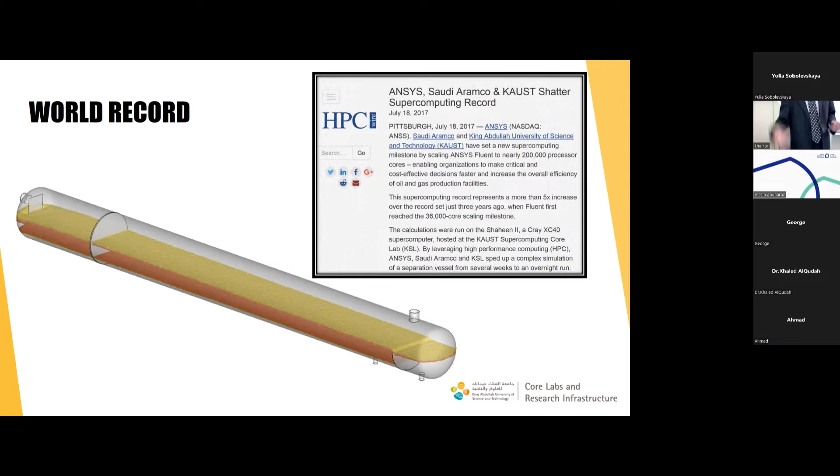You guys do a huge number of parametric sweeps because you don't know any material property of your problem, right? You don't know your geometry. So you just do a parametric sweep, you just want to run a parametric sweep. You have 2D matrices, you want to populate your results, some output on these 2D matrices. You do that, right? So what you have to do, your single problem is small enough.

You can get your result in one day, but you have to run 1,000 problems, maybe 10,000. If you are doing data science, many of your colleagues are doing data science on these artificially generated simulations. In order to have any meaningful deep learning workflow, you need huge amounts of data sets to train it, right? So all these parametric sweeps can happen on a supercomputer. All you have to do is write a simple Python script, have some intelligence in your input file where you can change the parameter with a script, and just submit this job.

Nice F1 car. I remember I told you that I need to motivate you guys. Okay, is this enough or not? So what do you see in this slide? Yeah, speak loud, it's okay.

Okay, let's get some terminology out of the way. What is a speedup number? There's no deep mathematics or computer science here. It's not an increment, it's a ratio. Speedup number means you take one core count as a reference.

Normally it's based on one core's performance, but you can start from anywhere. You run a simulation on n number of cores, then double the core count. Your time to solution should reduce, so the ratio of those times, the reciprocal, gives you the speedup number. Ideally, if you double your core count, your time to solution should halve, so the speedup number should be 2.

So what's happening? On 1024 cores, that's our base. On 2048, we get 1.8, when ideally it should be 2. Good enough. At 4 times the cores, we should get 4, but we're getting 3.4, not proportional.

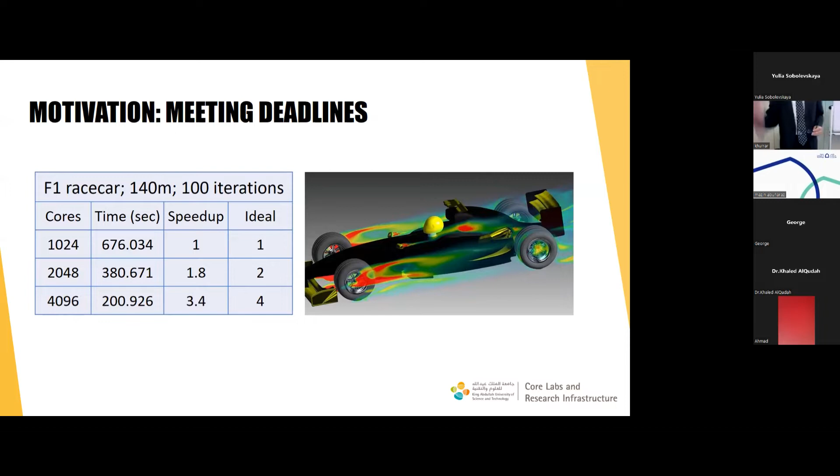Now I'll show you an actual hands-on session. Seeing is believing, you'll run the same problem on one node, then on 16 nodes. I did a screen capture, so you can see 65 iterations versus almost 1,000 iterations. It's real, not abstract, not just theoretical numbers. You'll see that parallel scalability does affect your time to solution.

Okay, this is a heavy slide, let's go slowly. I think you've covered pretty much all of these things in this workshop, so let's use this slide to repeat what we learned. You learned about partial differential equations. Is it safe to assume any master's student would have gone through partial differential equations? Or maybe there's some program where you don't cover them. Well, Navier-Stokes is a partial differential equation.

So you need to learn a little bit of partial differential equations. With every partial differential equation, you have some boundary conditions, Neumann boundary condition, Dirichlet boundary condition, and then you have initial condition if it's a time unsteady PDE. Then you need to know whether your problem is steady state or unsteady.

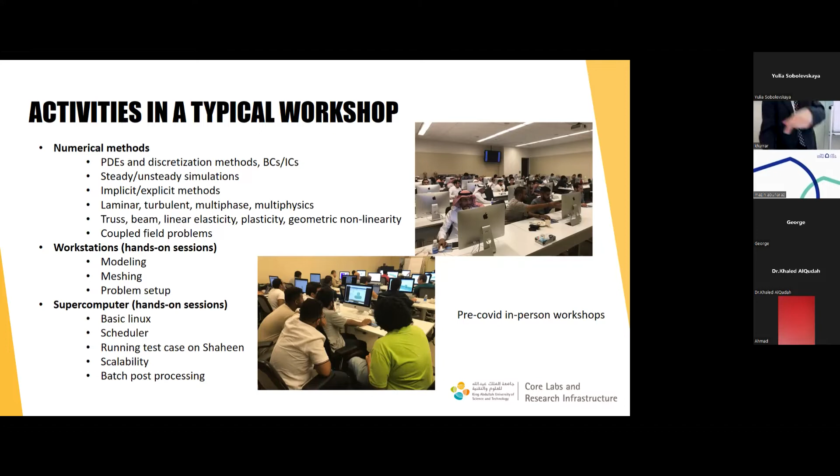Okay, so again, I think you cover modeling, meshing, and problem setup, and then you take it on a supercomputer and run it. I think we will do all of that by hand, and we have been doing it with the students, and they take a good interest in all of that.

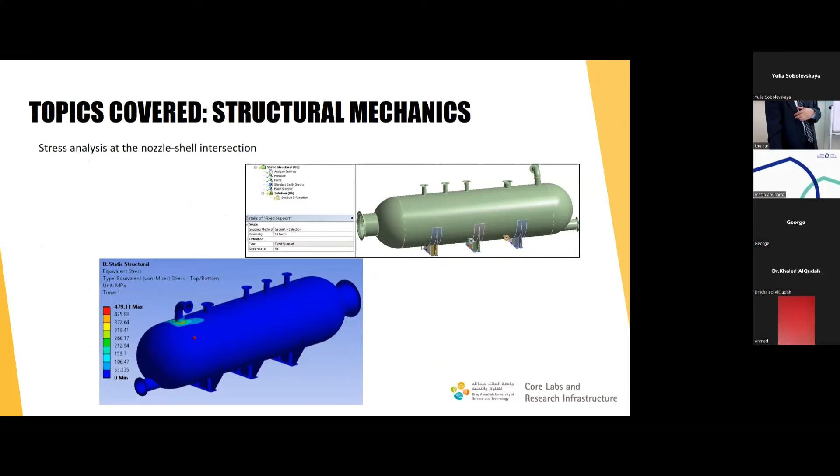Some structural mechanics problem we covered, a big problem. Some electromagnetics we did, basic CFD. I think this problem you probably did.

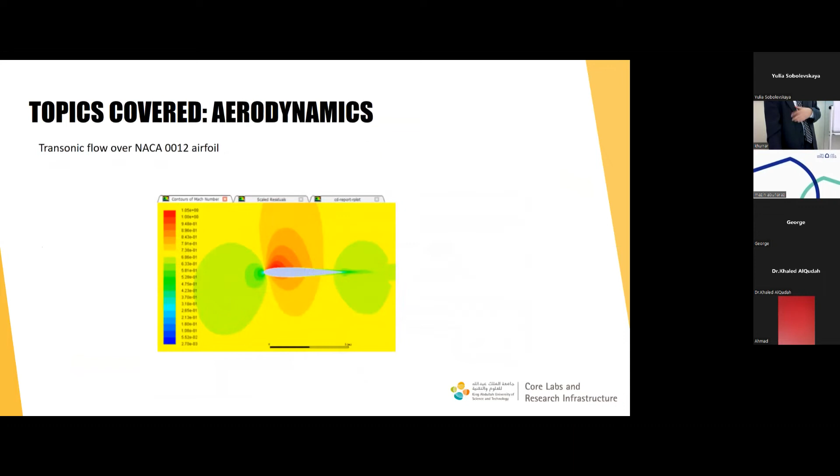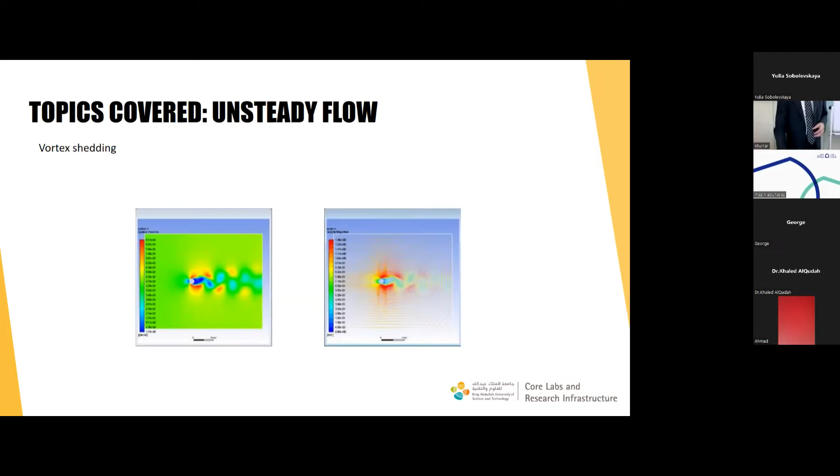I don't know, I mean this is just typing actually. There's 26 commands, so if you just type correctly, it will happen.

But again, there's another effort we are doing - we want to make these GUI type of things, because probably you guys will find it easier to press buttons rather than type. So that's us going out of the way too.

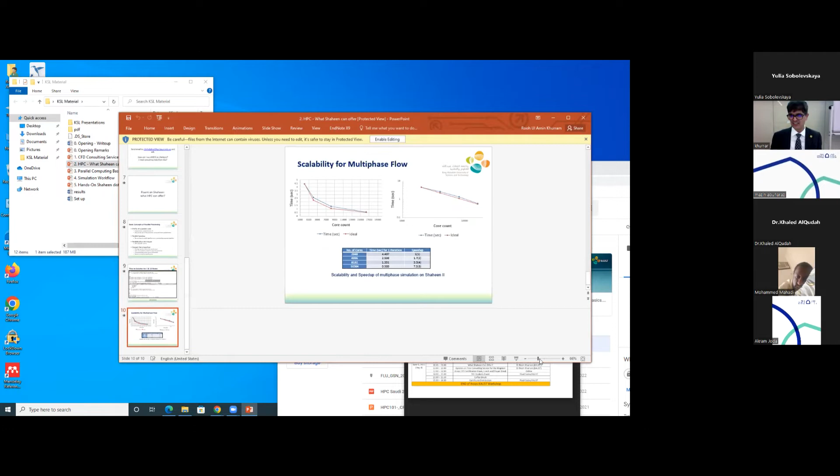I think we are almost done with this thing. That was actually the last slide. This is again for your papers.

If you do whatever you are doing in your research, and you want to show scalability, there are three ways of showing it. One way is the real professional way of doing it.

The first graph on the left just shows that as you increase the number of core counts, your time to solution is decreasing. It doesn't look very nice, actually. When you plot the same thing on a log scale, now you see a linear performance. That's how you report your results in a paper.

I think that also answers the earlier question about why we have a discrepancy between the linear and this, when we increase the number of cores, because it looks like this is a log function between the time and the core count. That's why it deviates from the linear increase.

But even on the log scale, it will start deviating eventually. Right now it's a perfect scaling. If you keep increasing, you will see that plateau. The table below is a speed up number, which to me makes more sense actually, it's easier to understand. But on papers, you report the log scale.

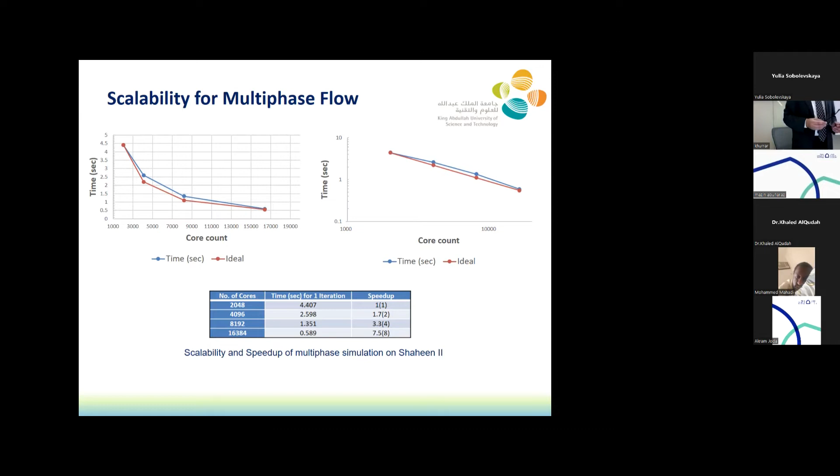So CFD is the most resource utilization operation, but the number of users are material science. KAUST has a huge amount of material science people. Dynamics, right, molecular dynamics or quantum mechanics - DFT people, she is from that group. DFT is huge.

Before we get to the hands-on session, let's go a bit faster, because I've covered a lot of things already. I will rely on you guys, one of you telling me something and then I'll go faster. If you don't tell me anything, I'll be stuck on these concepts.

So a little bit of basics on parallel computing. You like fishing, right? So if you go fishing alone, how many fish do you expect in an hour? You got 2, 1, 0, 0.

Oh yeah, yeah, I understand. So 2 - this guy, how many does he have? Oh he has 0 actually. So more the merrier, right? More fishers, more fish. Not difficult, right? Put more people to work, you'll get more work done.

What is the catch? The catch is the work needs to be done at the same time. Separately is fine, but there are two different paradigms for doing it together or separate. We'll go through it, but the important part is at the same time. Otherwise there's no benefit, because I can wait two months to get those. One guy can do everyday work. I want all the work done at the same time.

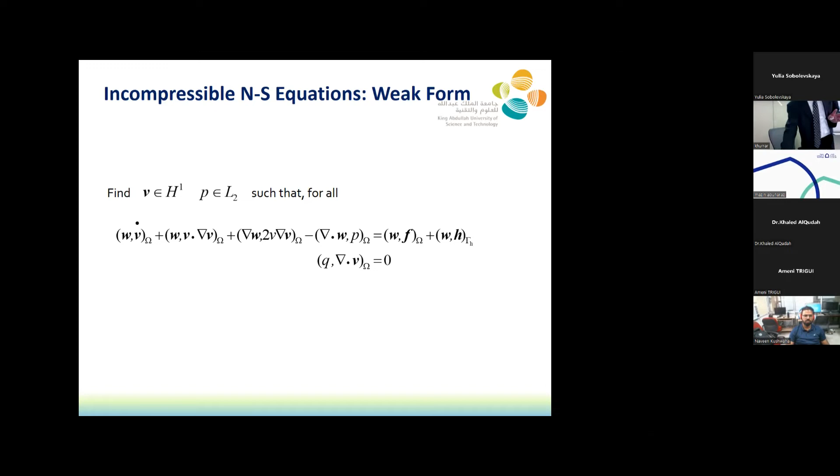If you change the weighting function, you can derive all these methods. If your weighting function is equal to 1, that's the finite volume formulation - that's exactly what Ajay was showing you yesterday. It was the same Navier-Stokes equation, but written in integral form, with no weighting function appearing. If you have a Dirac delta, that cancels with the integral sign and gives you a discrete formulation - that's the finite difference formulation. If you have the shape function itself, that's the finite element formulation.

I'm not going to take you through SUPG, GLS, and least squares methods, but in the least squares method, the residual itself is the weighting function - residual dotted with the residual itself is the least squares formulation. It's a beautiful concept, actually.

People, 20 years ago, used to write papers saying this method is wrong, this method is right. But there was a groundbreaking paper about 15 years ago titled 'Finite Element and Finite Volume - Two Good Friends,' saying don't fight, they're two good friends. Mathematicians knew back then, 100 years ago, that they're fundamentally the same. So now you realize they're fundamentally the same, it's just a different implementation.

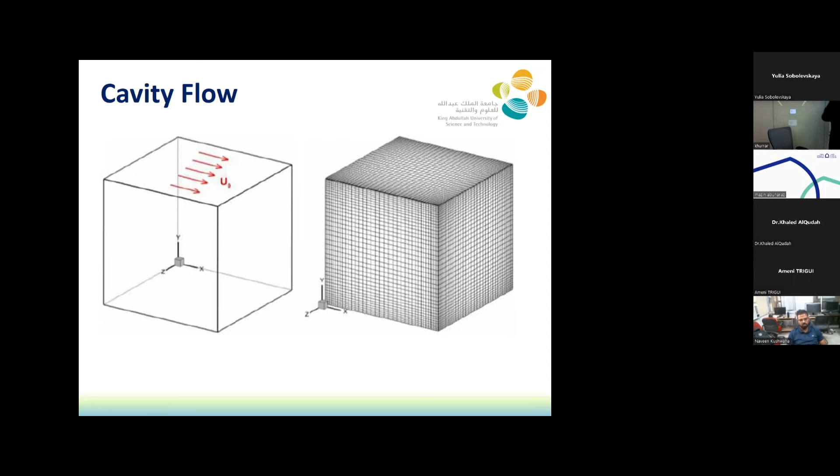And the top wall is moving. So if it is moving with some velocity, it's going to give rise to a shear layer, there will be shearing, and then there will be recirculation. So what is the applied importance of such a flow? Any natural phenomena that resembles this type of thing? Yeah, tornadoes, hurricanes. Yeah, so if you handle this problem nicely, you can model those shear flows.

This is the last descriptive part, and then we go into the workbench. That's how you interact with the supercomputer. You really need to understand this. Yesterday, or the day before yesterday, you learned how to model your geometry. Then you learned how to mesh it. By now you know this, right? I assume that you know. We'll go over it again.

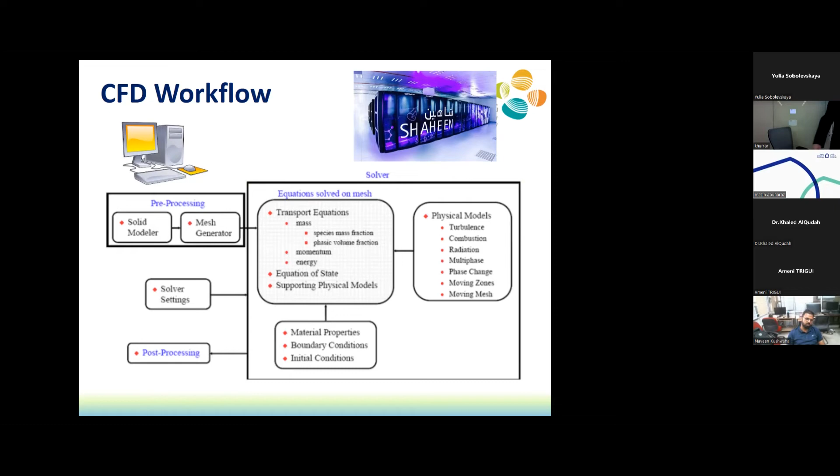Once you have your model ready, you can run it on your workstation, or you can copy this data onto a supercomputer, get your solutions, and put it back on your workstation. So that's the cartoon that it is showing. Not very difficult, and we'll go through this thing right now. So if you can open your workbenches now.

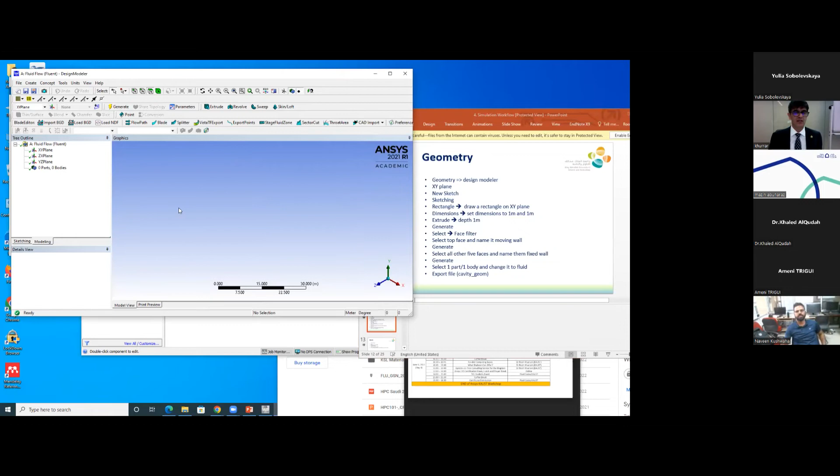Well, I try to do it extremely simple. Probably nothing can be more simple than that, but there are some advantages to that. DesignModeler is open. Anybody having problem opening the workbench? No? DesignModeler is open? Yes? No? Click on the XY plane.

You can see the cursor. Online friends, you might have trouble following my cursor, but I'll try my best. I click on the XY plane, right? Turkey? No, you need to tell me.

Okay, yeah. Now the next step, new sketch. You can see this picture over there. Yeah, click on it, it's a new sketch. Good, go to the sketching.

Click on the rectangle. Go to the center and draw a rectangle. Done? What's the next step? Did we cover dimensions?

Okay, click on dimensions, and take the cursor here and do these things. So I'm going to, well, since Turkey is the volunteer, I'm going to help only. Okay. Anybody who has not done this thing? Oh, you need help? See?

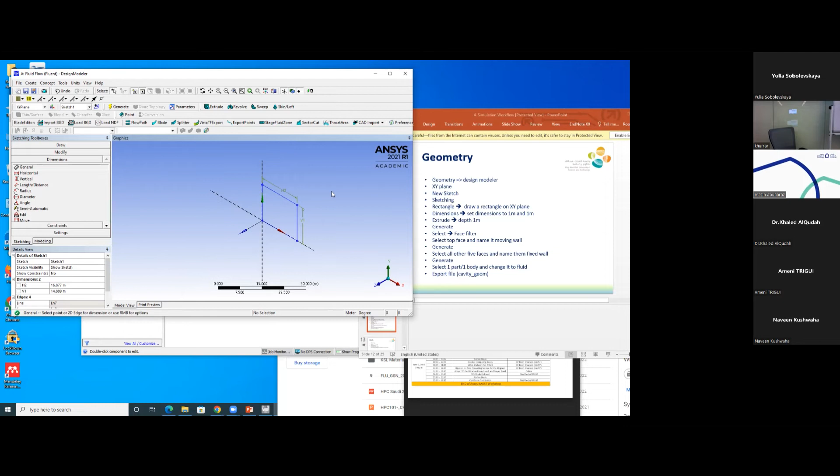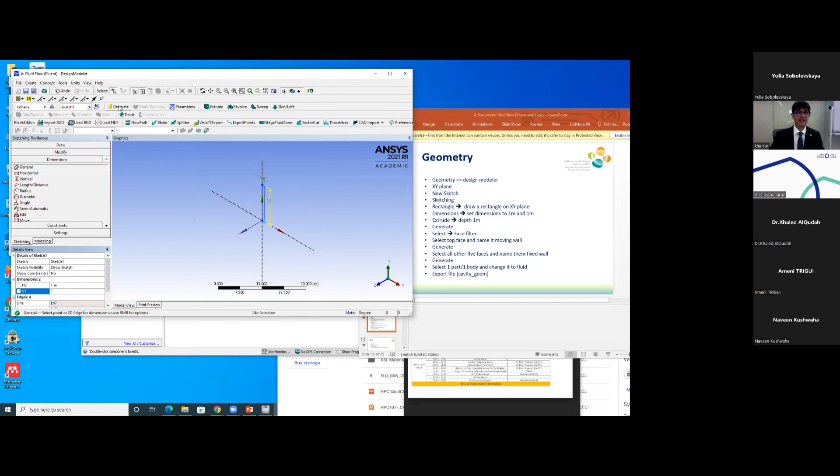I should not be showing my cheat sheet. So you guys are with me? Let's put one meter and one meter in these dimensions. Press generate, don't forget to generate things, and then make it a little bigger.

Oh, generate is up there. All right, now we go into face, extrude. Can you see extrude? Extrude, right? Extrude, and the depth one meter. It's already one meter. I'll put one meter again, and it's gonna make a cavity.

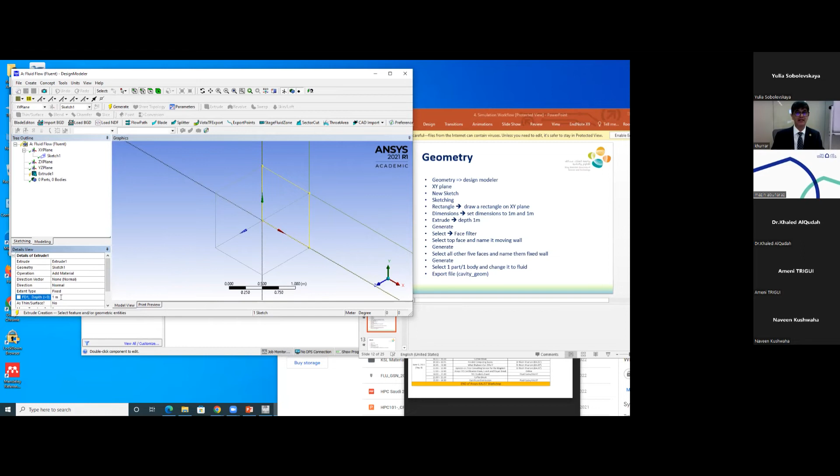After every important thing, you have to press generate. Once generate is done, you will see one part, one body. Are you guys there? This box in front of us, this is our cavity, right? But mine isn't centralized, isn't going around the screen.

Oh, because when you were making a rectangle, you're not exactly at the center. So probably doesn't matter, let's just go with it.

Anybody who needs help right now? I really want you to actually go through the whole thing, otherwise no point. Yes, where are you? So can we do this in SpaceClaim too? Yeah.

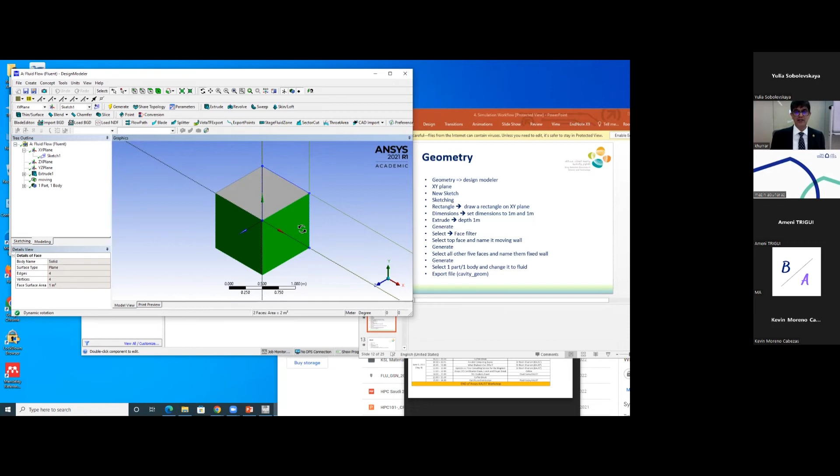Yes, with the same selection, we want to branch them together. Now I'm going to put this. Do we need to select the two faces for the moving? No, just one. Just one. Okay, now I'm going to rotate this guy and go behind.

All right. And then I'm going to untoggle this rotation button and put control again and do the click here, click here, click here. And then right mouse button, and I name this thing fixed.

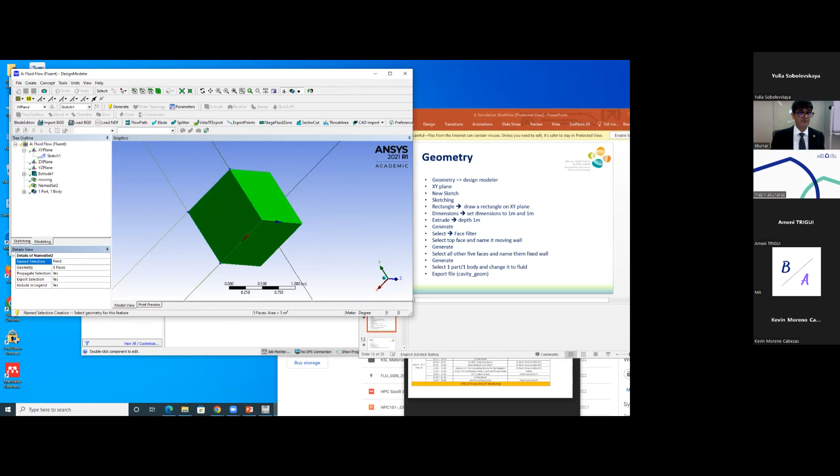Okay, and then generate. How many faces down there? 5. 5 faces. Yeah. Okay, so let me show you. This is my moving face, and this is my fixed face. Moving, fixed. We are basically done with this thing, but I want you to be there because if you fall behind, right?

I thought that 1.5 hours is enough. I think we should have more time. Now I should have more time.

Yes. I'm sorry. I'm sorry. Yeah. So

Okay, here is what I propose right now. I know somebody might have pressed something wrong and they're falling back. That's fine. So at least on your row, if you can find someone who is doing something, team up and follow me. Otherwise, we are going to fall behind. We have to give a test at 12:30, so there's some limited time. All right.

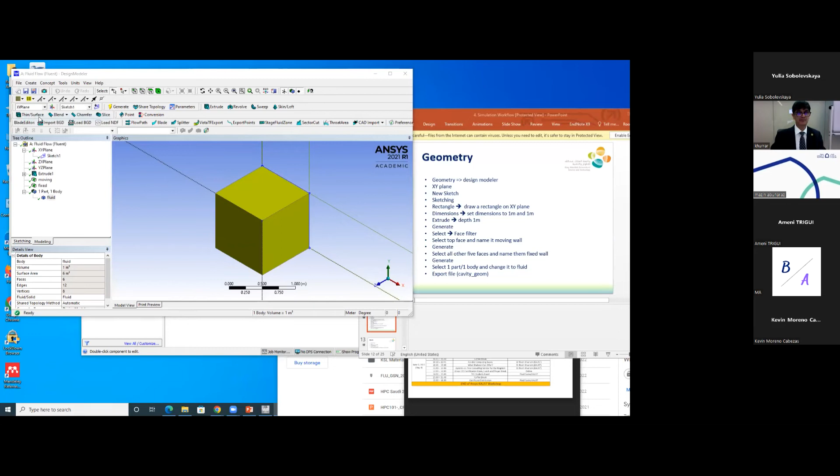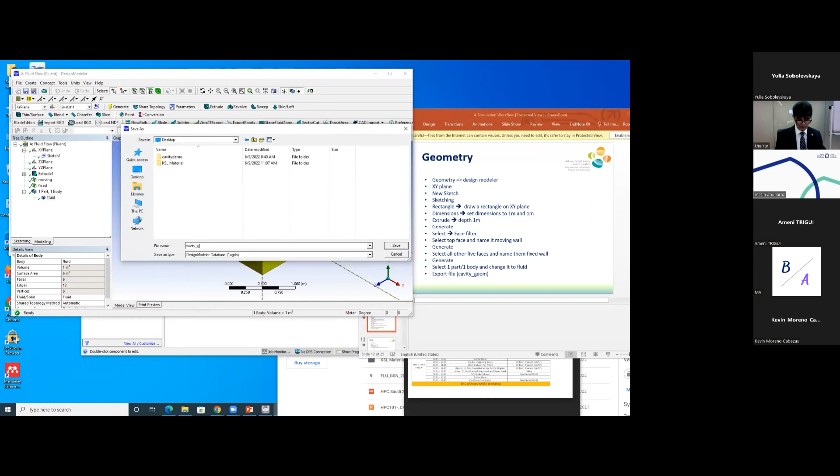If everything is done right, we are done with geometry. We export, sorry, we export, file, export. Wherever you want to do that, desktop is fine or wherever. Desktop, and then you can name it cavity_geom or leave the extension as is. I save it. Okay. Now I'm closing modeler.

Anybody who wants some help at this point? Okay. I'm closing modeler.

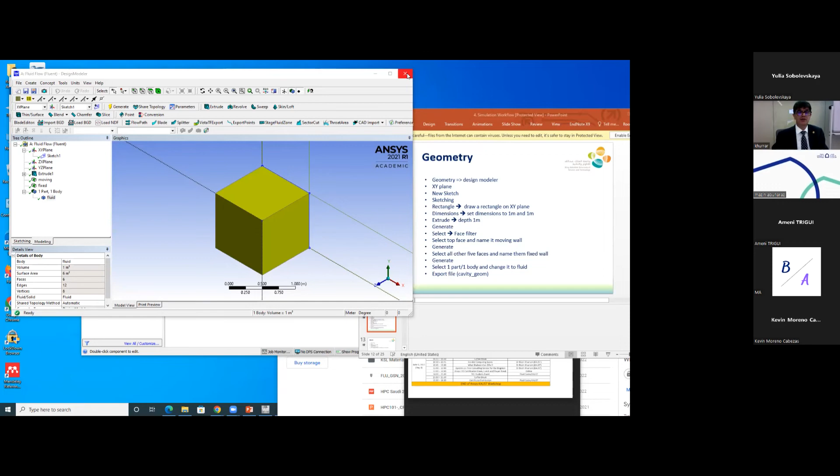Okay, what do we do next? When we go into the workbench, we see geometry is checked now. Good. We go into the mesh, right mouse, and edit. Edit meshing. It's going to open.

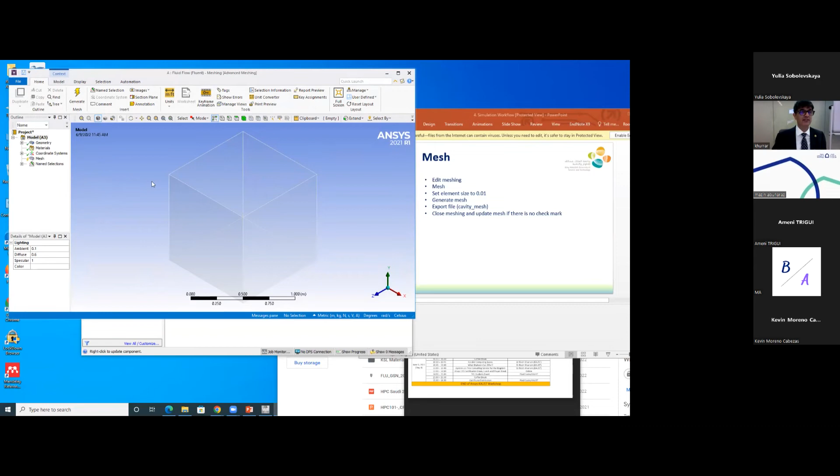Okay. Yeah, it's going to take time because you see starting meshing. So now you see this thing. Okay. Are you guys on meshing? Anybody on meshing? Are you on meshing? Yeah. Okay, so you can see that. So at least in one row you have someone. Are you guys fine? Anybody who's doing fine here? Oh, fine.

Meshing. Let's do meshing. So here is the fun part. You click on mesh, and then you define element size. Mesh. You clicked on mesh and go into the element size. What do you want to put here? I'm sorry? Size, but what is your idea of size? What do you want to put? 100, 2, 0.01, 0.001. What are you thinking before you're doing it?

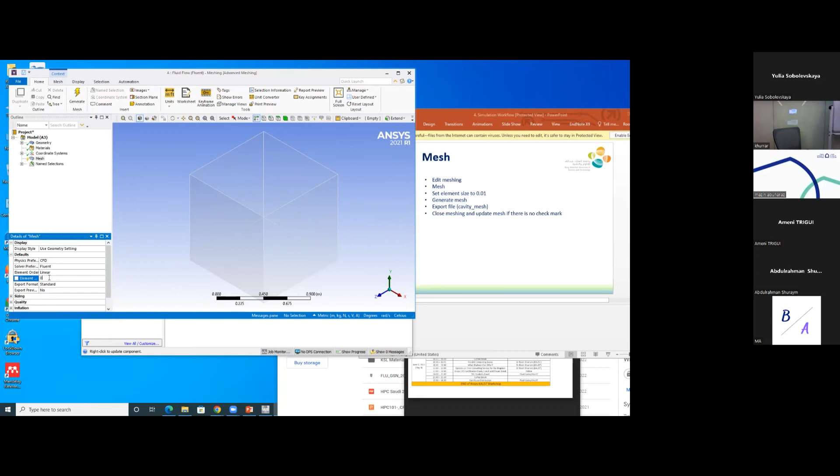And on top of that, you need to refine the mesh, maybe not uniformly. You might want to cluster it on the top wall because all the action is over there. Right now, I'm not doing it, but just think about it. Okay, the online people put it as 0.1. In-person people put 0.01. Let's give more work to Shaheen.

All right. Generate mesh, and wait. It's going to take some time. Generate, huh? Generate mesh. Just general mesh, or we can specify the mesh. We can do everything, but right now we are not doing it. We are making it extremely simple.

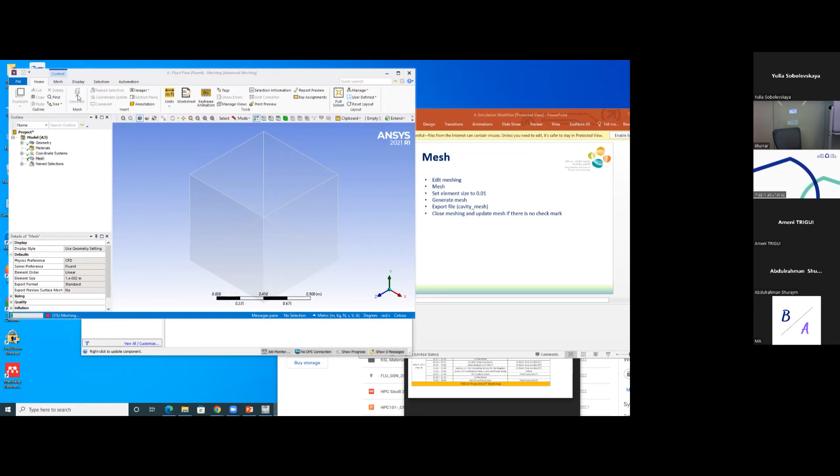Why do you have very small elements? Because I put 0.01. What did you put?

Element size, 0.01, 0.01. Generate mesh. So now the height here is 0.01. Your length is 1, so you would have 100 elements per stretch. It's like 100 times 100. Okay, 1 million elements.

So at least I see a few people here. Are we done with meshing? We defined our boundary surfaces, we meshed it, we defined the domain, we defined the physics. So far so good. We are done with the meshing.

But before we close meshing, let's save the file. File, export, mesh, fluent input file. Export, put the name, put cavity underscore mesh.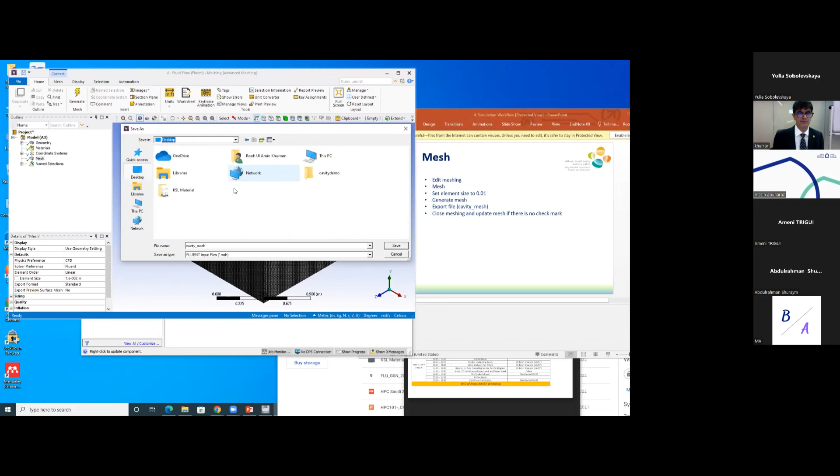It's arbitrary, but well, I'll come back to that, but let's put it in the same desktop place. Okay, I'll do that again.

So you have a help over there, you have local help. That's exactly what parallel processing was. If you have local help, that's more efficient.

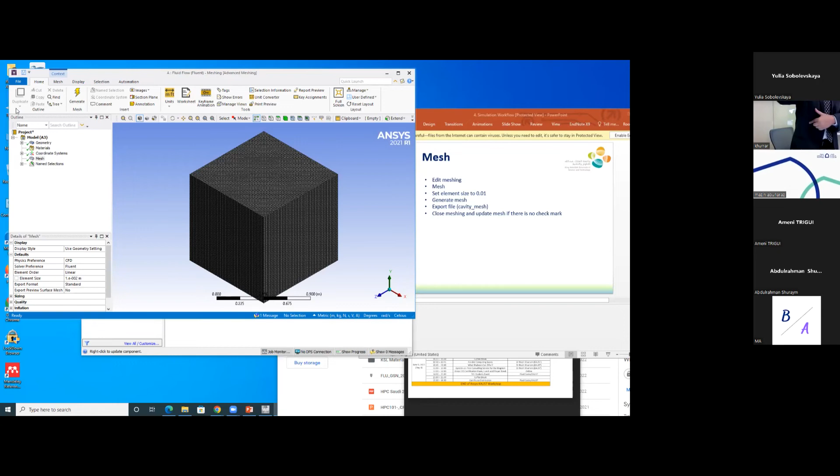Okay, I'm done meshing. You are with me? Yes. You are representing everybody. So you're responsible for it. I'm just going to report everybody did what you did. So file close, I'm closing meshing.

So we go to the next step, setup. Now you see mesh has some lightning thing in front of it. It didn't like something, I don't know what it is. I don't even understand what it is, but what I do is go here and put update.

So who is saying that? Have you seen this thing before? Yeah, here's your experience as a current user. During this session or before that? Before that, yeah. So you update, and things line up. And I don't ask why. Me either, but I asked, you explained. Thank you.

So that's a thing. When we are in the software world, logics don't make sense. It's just pressing a button, right? There's no maths there. If you're stuck, you're stuck. So no amount of IQ is going to help you if you get stuck in these things. So let's not get stuck, and let's be all together.

Yeah, we are done with this. So when I update it, I get a check mark. Check mark is good. Okay, now setup, edit setup.

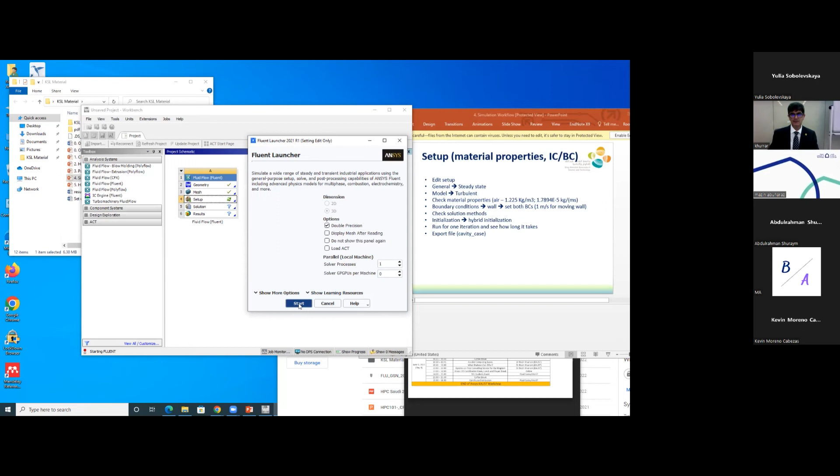Don't display mesh because it's going to make life difficult, it will be slow. So don't do that. So start.

Okay, while it is starting, what do we have to do? We have to set up our boundary conditions, we have to initialize, we have to look at the material properties, we have to look at the solution solver, steady, unsteady. What else? Turbulence—is it a turbulence model or not, what type of turbulence model, what type of numerical scheme. Yesterday there was a beautiful discussion about third order scheme, second order scheme, all those types of things. That is what's going to happen now.

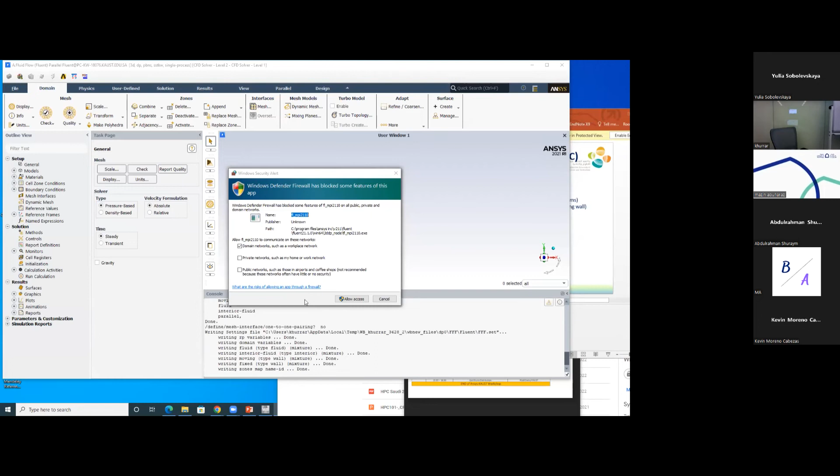Okay, I think it just cancels, and it works. Just don't—okay, yeah, I think I don't know. These are one of those things nobody has an answer to, but we just do something and it works.

Okay, so if you guys are falling behind, no worries, just follow this thing, and then I'll give you typed things. You just repeat it, you'll be able to do everything. Then just follow with me, use it as a demo, not hands-on. But if at least 5, 6 or 10 people are doing hands-on, awesome. Do you have a question, sir? Okay.

Yes, so which... okay, I don't know at this point. No, you become like my... just follow them, and then we'll work it, because we really have limited time.

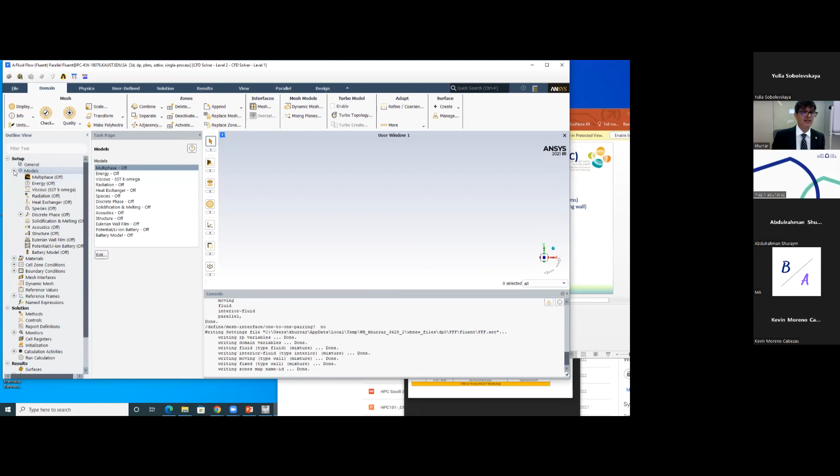All right, folks, attention. General pressure-based solver density based. We are doing pressure-based solution, steady state, unsteady. Just click steady state. All right, models. By default it is doing SST k-omega, it's fine if you have reasonably high Reynolds number, let's be it. That's fine. Turn off multi-phase, we don't need any of all the things. Models are fine. Material, fluid, it's air.

Let's look at the properties. It's air, these are the density and viscosity. We're fine with that, we like air. Okay, we don't want to do anything here. Cell zone condition, boundary condition, these are the important things.

Boundary conditions, internal and wall. Wall, double click. These are the two walls that you set it, right? Moving wall first, double click. Moving wall, right? Put the velocity here.

When you're going to put the velocity here, you're going to set your Reynolds number, because your density is fixed, viscosity is fixed, dimensions are fixed. 1 is a high Reynolds number. If you put 1 meter per second, which is very small velocity, it's a high Reynolds number. Let's see if we can solve it or not. For online people, since you have done 0.1 in the dimension, change it to 0.01 meter per second, please. Apply.

Okay, close. Let's look at a fixed boundary condition. Pretty much nothing needs to be done over there, but let's just take a look at it. Stationary wall, nothing, no slip, fine. We are fine with that.

All we have to do after this is, these are method details. I don't want to go because we don't have time. Defaults are fine. I'll be happy to go into the details, but defaults are fine right now.

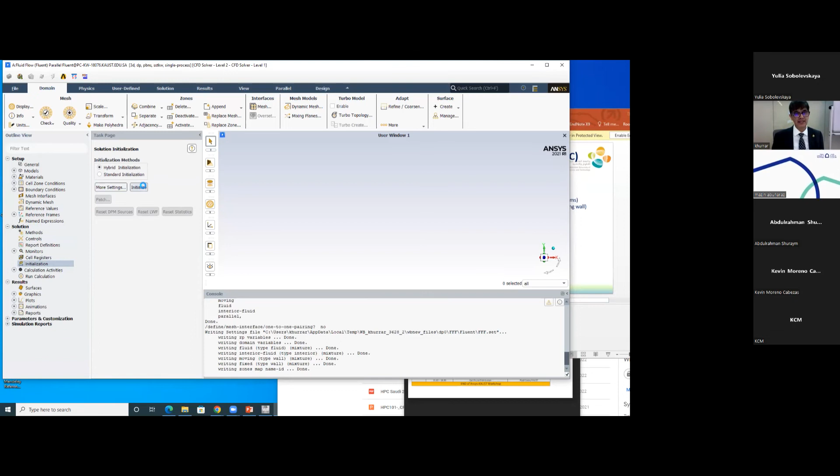And then initialization is important. Initialization, hybrid initialization. Initialize. Then you're done. Okay. Yes.

I don't know what is inside it. I don't know, it's a Fluent specific thing. Wasim, do you know what is the difference between standard initialization and hybrid? If not, what I think it is, don't quote me on that. I can confirm in a minute.

Standard initialization would be, if you want to write your code, what is your initialization? You say okay, start from 0. You have velocity field and the pressure field. You say 0 velocity and 0 pressure. Hybrid would make it a bit more intelligent initialization, so that you start at a better initial solution. So the challenge is that if you give a better initial solution, you will have fewer iterations to converge.

So what you can try, not right now, but after that, is run a solution with standard initialization and hybrid initialization and plot the convergence on top of each other. My guess is that since this is a simple problem, both will be the same, but for a complex external problem, the hybrid initialization will converge faster. That's all I can say. No, of course not.

Initialization is for steady state problem, initialization is arbitrary. You agree with me? For a steady state problem, initialization is not important because your time dependent term doesn't matter, it's just temporary, it just marches you to a steady state. If the schemes are convergent, consistent, and all those things are right, you start from any arbitrary initial solution, and provided you are convergent, you will get to the unique numerical solution.

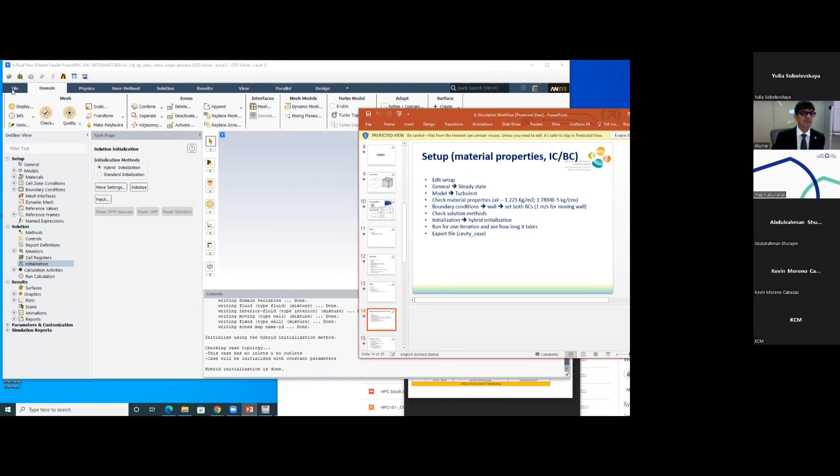Export. Can you show about methods? I'm sorry, there is an online question. Yes, sir. I didn't get your question. So what methods have we used? Is it coupled? We just left all the default methods. Okay, sir, we didn't change anything. All we did was set boundary condition and the initialization. That's it.

Okay, sir. Export case file. So now you are exporting a case file. For unknown reasons, every time I try to export a case file, some weird things appear here. I have to do this manual editing. I don't know, is it just me, and absolutely no explanation for that. I don't know. So for a case file, I need to put the path. I'll go to desktop and then I'll name it cavity_case. All right.

Okay, it's going to write the case file. Not assign any report, I'm sorry. It is not assigned any report on the surface, the report definition. So you did not assign any of the report definitions. No, you don't need to monitor any of those. We'll just look at the convergence. We'll have the solution file and look at the solution.

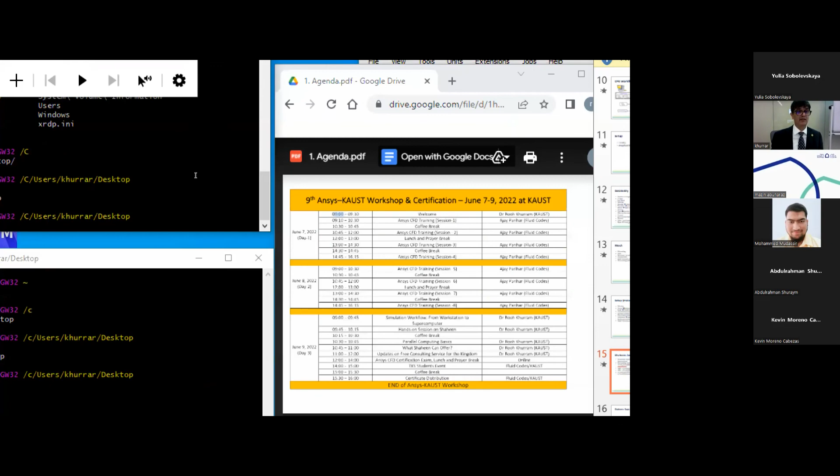Yeah, both are on desktop. It's fine, it's bigger, but I don't know how. Okay, yeah, here it is. That's better.

Okay, but I don't see the... I cannot see the other thing. That's the thing, so it's better for you, not for me. Okay, but let's see. Okay.

It's Windows, just reduce the size again. If you reduce the size again, it's gigantic. Yeah, I don't know how to do that. Sorry? I don't know how to do that.

Okay, here, exactly, so open this one. Open whatever you like, this one. Yeah, just you can press this one and just control Z, so you can increase. Okay, so we can. Perfect.

The password was not working. Okay. Should we put yes or no? But what, you need to ask you something, yes or no? Then you start with your own, continue, connect. Yes, press yes.

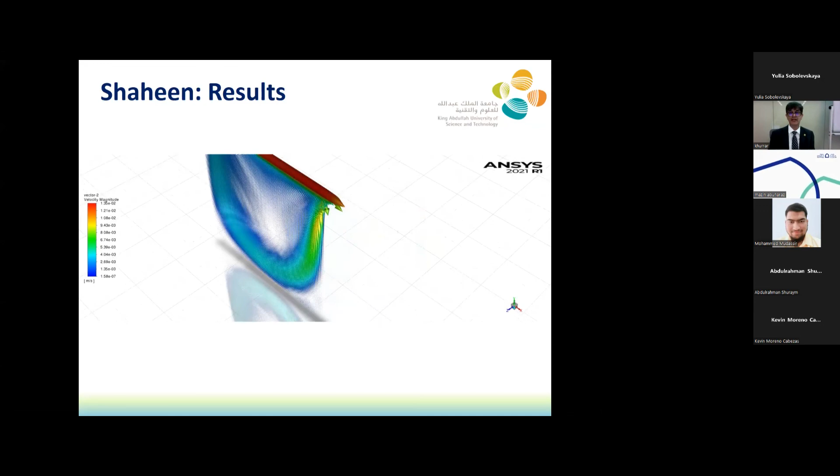They're fine, they're good. But this is important. This is the last slide. Now take a minute and try to understand it, and let's discuss what it is.

So when will I go on the right? Why will I use 64 million mesh when my Reynolds numbers will be high, right? So you need to have some idea that this is my Reynolds number. I need to have some mesh like this, and I'm solving turbulent flow, right? So your mesh will be determined by that.